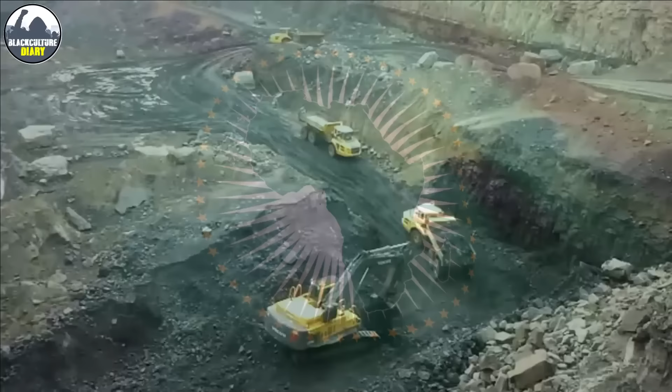Can Africa's rich resources facilitate a shift to green energy? Burkina Faso has taken a bold step with the completion of its hydroelectric power station. This station marks the beginning of a new energy journey for Africa. It promises not only a better economic future, but also an improved quality of life for the locals, as it is safer. However, how smooth will this transition be? And what does this project signify at this moment? Let's find out.

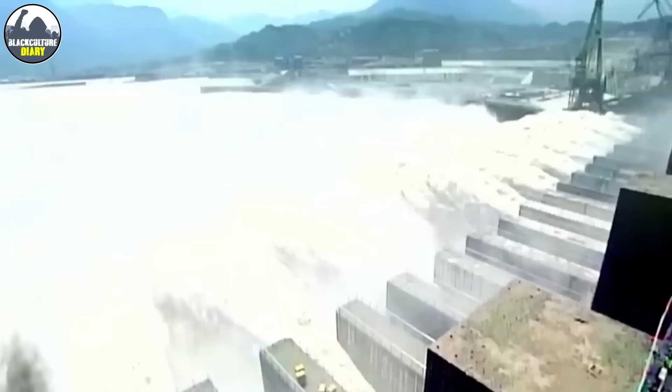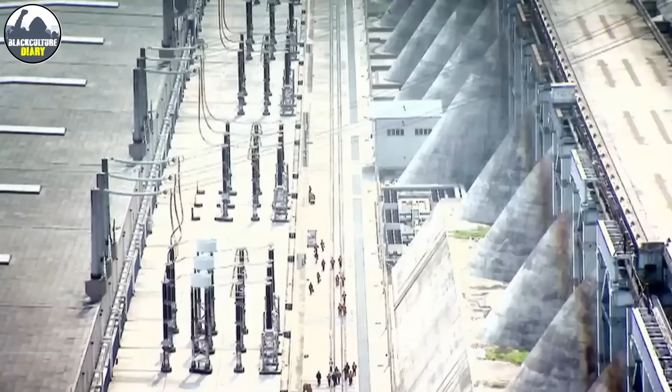The recent completion of the hydroelectric power station marks a significant milestone for Burkina Faso. This mega project, which promises to revolutionize the country's energy sector, has been meticulously executed and is now poised to begin operations. The power plant is expected to provide a reliable and sustainable energy source, contributing to the nation's economic development and improving the quality of life for its citizens.

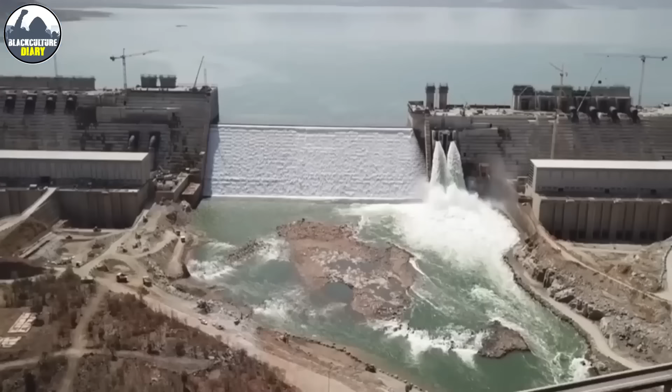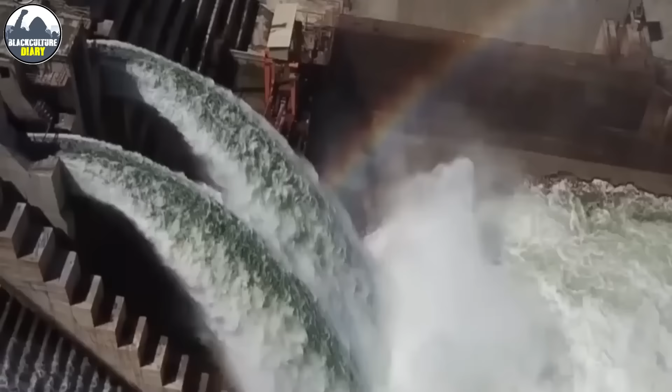But why this initiative? The idea for the hydroelectric power station was conceived as part of Burkina Faso's broader strategy to diversify its energy sources and reduce reliance on fossil fuels. The project aimed to harness the power of the country's abundant water resources, leveraging them to generate clean and sustainable electricity. Initial feasibility studies were conducted to assess the potential sites, water flow, and environmental impact.

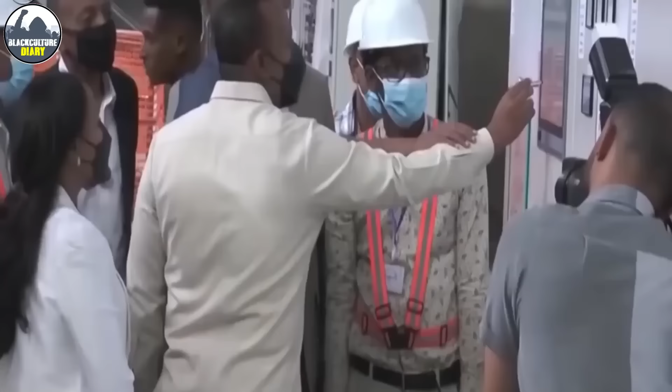The planning phase involved collaboration between local and international experts, government agencies, and private sector partners. Detailed blueprints were created, outlining every aspect of the construction process. Environmental assessments ensured that the project would not adversely affect local ecosystems, and measures were put in place to mitigate any potential risks.

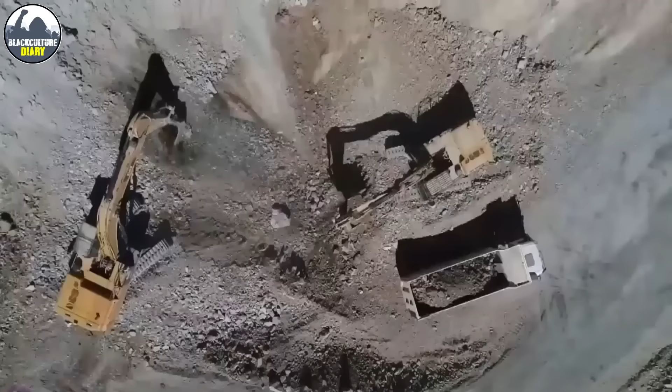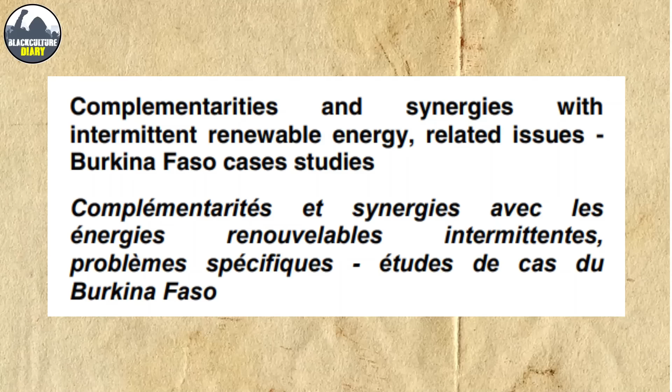Construction of the hydroelectric power station was divided into several key phases, each requiring specialized skills and technologies. The first phase involved the construction of the dam, which required extensive excavation and earth-moving activities. Advanced engineering techniques were employed to ensure the dam's structural integrity, taking into account factors such as water pressure, sediment load, and seismic activity.

The second phase focused on building the power station itself. This included installing turbines, generators, and transformers, all of which are crucial components in converting the kinetic energy of flowing water into electrical energy. The installation process required precision and expertise, with teams working around the clock to meet tight deadlines.

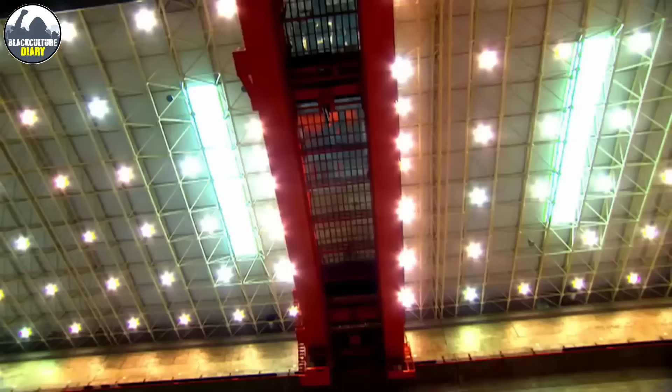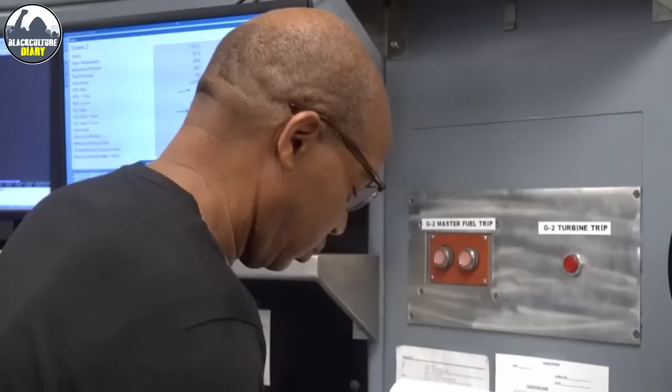The third phase involved constructing the infrastructure necessary to support the power station's operation. This included building access roads, water intake and outflow channels, and housing for the operational staff. Additionally, control systems and monitoring equipment were installed to ensure the plant could be operated efficiently and safely.

Throughout the project, stakeholder involvement was crucial to its success. Regular meetings were held with government officials, community leaders, and environmental groups to keep them informed of progress and address any concerns. This transparent approach helped build trust and ensure that the project had broad support.

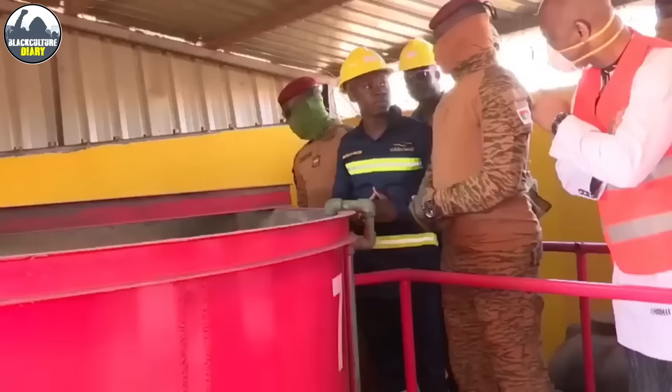International partners played a significant role in providing technical expertise and funding. Development agencies and foreign governments offered grants and low-interest loans, recognizing the project's potential to contribute to regional stability and economic development.

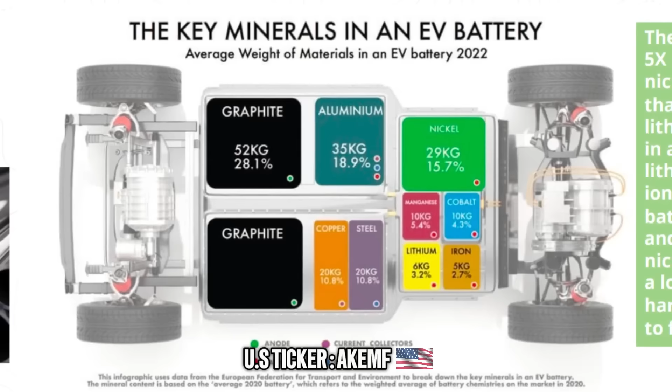Do you know that the United States has only one nickel mine? We import almost all the nickel we use, and that is risky. Earlier, the United States did not know what nickel would mean in the future. That's because no one had the idea of green energy and electric vehicles, in which nickel is the main component. After all, nickel is used in batteries, making them more energy dense, giving longer range.

The United States chose to outsource nickel production, relying on globalization. But now, the hard reality is, no country can depend entirely on globalization, because countries like China, Russia, and their allies are determined to break the world order, which is mainly driven by the United States, having globalization at its center. Not only that, but demand for nickel has increased to a historic level due to electric vehicles and clean energy. Elon Musk said nickel is his biggest concern in scaling lithium-ion battery production.

That's why he asked miners to mine more nickel, without which green energy storage is not possible. However, S&P Global Intelligence says nickel is difficult to find and discover. And as of now, there are not enough nickel mines in the free trade countries of the world, even if we ignore mine scarcity in the United States. So, what does it mean? Well, at any moment, the United States could have a severely reduced nickel supply. The single mine in the US has limited capability and is scheduled to run out of ore soon.

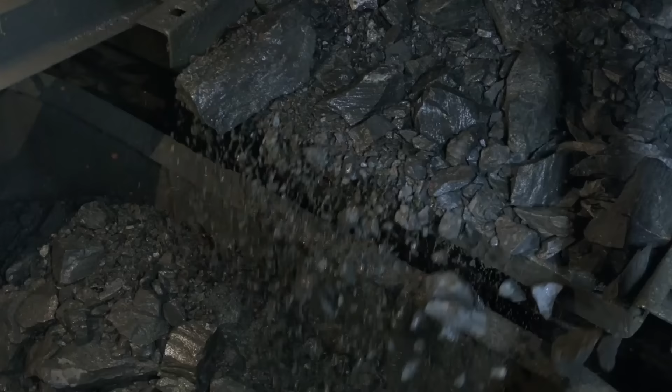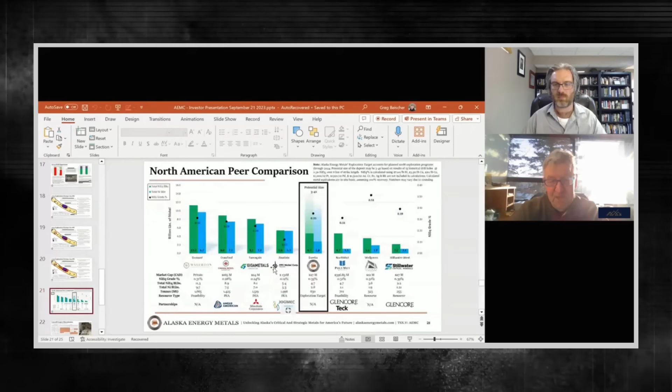And the project deserves that kind of approach. It's not a go-slow thing. America needs nickel, that much is very clear. And we've got it, but we've got to prove it too. We have a quite high confidence level that it's there based on historic drilling, but we've got to drill it off at 300 meters to be able to say that with geologic confidence and in keeping with the 43-101 regulations.

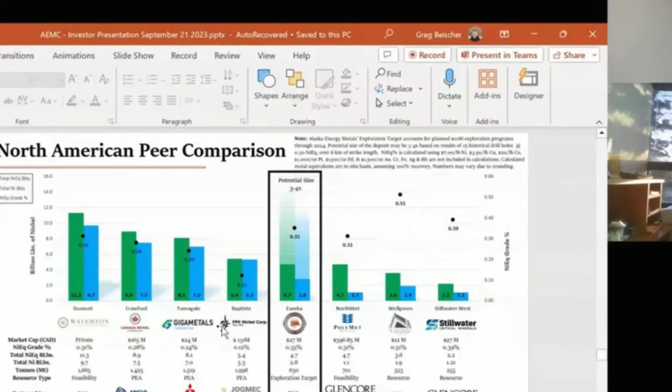But what if a nickel mining company can capitalize on this and use it as leverage? Well, Alaska Energy Metals, traded under the ticker AKEMF, is the leader in this. And what if you would invest in this company? Before doing so, you have to know some truths that will make you wonder why you did not come to know about this company before.

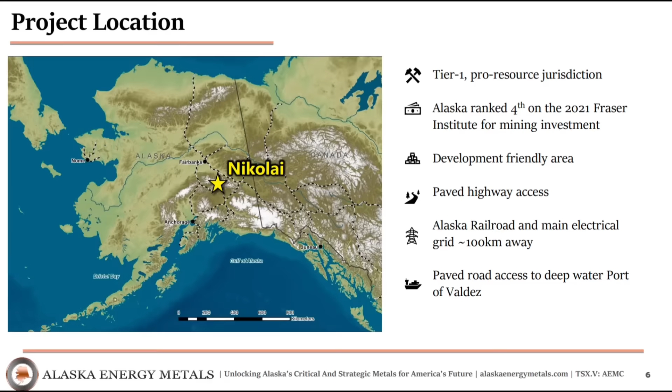You should know that there's another nickel company, KoBold Metals, that has some heavy hitter investors, like Jeff Bezos, Richard Branson, Ray Dalio, Bill Gates, and others. This company uses the most cutting-edge AI to find nickel. And guess what? Their algorithm identified the Nikolai project area as being prospective for nickel mineralization, exactly where Alaska Energy Metals' property is. So KoBold picked up a massive piece of land right next to Alaska Energy Metals' Nikolai project.

Alaska Energy Metals has an extensive data set which partly covered KoBold's claims. Guess who bought the data? Yeah, KoBold bought data from Alaska Energy Metals. Listen to what the CEO of the project said.

This is the project that brought me to Alaska in 1995. My first career as a young geologist was with Inco, and they had moved me all around North America, and I learned a lot, but they moved me here to be exploration manager and to focus on this project, which the global targeting team had identified as having similar geologic and geochemical characteristics to the Norilsk area of Russia, which of course is probably the largest accumulation of nickel sulfide deposits on Earth.

Now you might think that this will make Alaska Energy Metals shares expensive and unreachable for ordinary investors. Well, luckily, that's not the case. The price the CEO negotiated for this property is literally the deal of the century. The previous owner of the property, which is now controlled by Alaska Energy Metals, spent $30 million on drilling and other exploration efforts to define the nickel in the ground. But the CEO of Alaska Energy Metals, Gregory Beischer, bought the data and the land package for only $1.8 million.

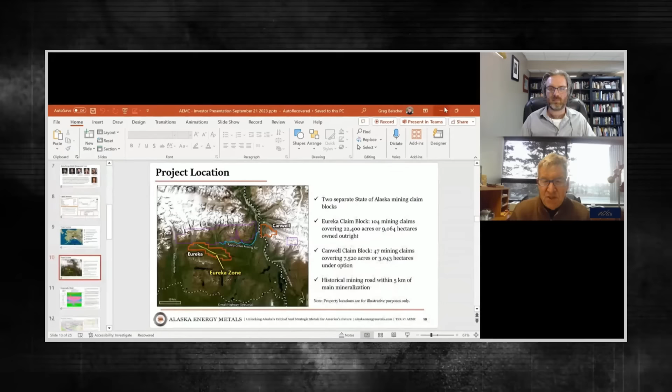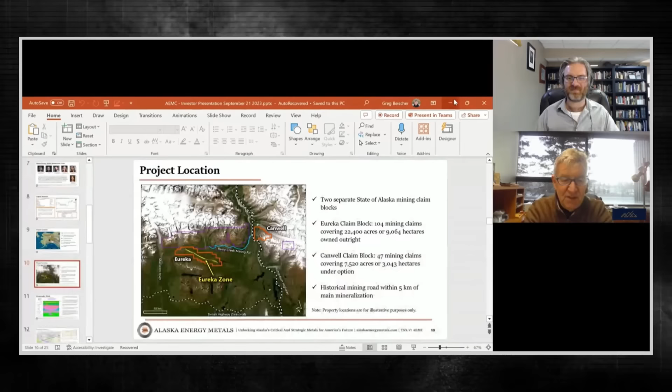That's 95% off. Listen to what the CEO said. I saw the claims come open around 2018, didn't move immediately on it, but after a while I saw that these lower grade disseminated sulfide deposits really might be the next generation of nickel deposits that our industry has to mine to meet what appears to be a surging demand. So we jumped on it. And so it was kind of full circle for me. The project that brought me to Alaska, I'm on it again. And in the intervening 25 years, I've explored all over this great state.

As of now, the market cap of the company is only $14 million, which is so undervalued. Similar companies that are a little more advanced have a market cap between $100 to $180 million. Just for comparison, Alaska Energy Metals owns a nickel resource containing 8 billion pounds of nickel, and its market cap is $14 million. However, Canada Nickel owns a resource of 13 billion pounds of nickel and has a market cap of $180 million. So yeah, there is that.

This means that no matter what, the market cap will reach its normal level. We can see the potential for Alaska Energy Metals' market cap to rise up closer to its direct peers, rising from $20 million to $100 million and beyond. And those who would have invested in the company at these low share price levels could see their stock prices swell as the company advances the project.

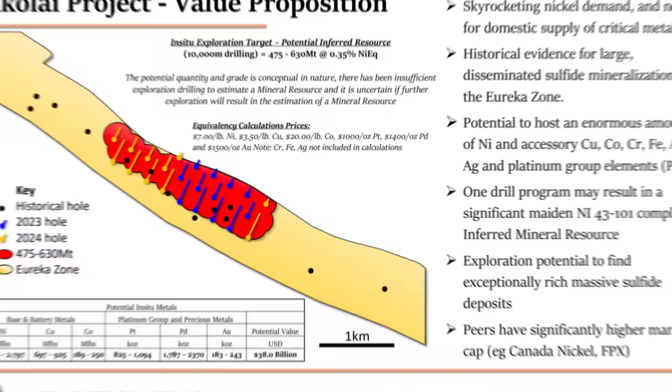And guess what? The company is actively working on defining the resource, which means that the biggest single catalyst for shareholder value creation is imminent. Listen to what the company's CEO said. Well, our main focus is the Nikolai project in central Alaska, where from historical drilling it looks like there should be a very large deposit of nickel with accessory cobalt, copper, chrome, and platinum group elements.

And I've known about the project a long time, and I've decided that our company will focus on this project, and we're drilling off. We've done the drilling this summer and should be in a position to announce our first resource quite soon. And I think it's going to open some eyes. People are going to realize this could be a really large accumulation of nickel metal.

Earlier, he founded Millrock Resources, leading a team that built a successful project generator company, attracting over $50 million in capital. And just recently, Mario Vetro joined the board of directors. He earlier co-founded K92 Mining, which employs 1,600 people in Papua New Guinea, where the company produces high-grade, low-cost gold, and trades at nearly a $2 billion market cap.

He brought with him Ian Stalker, who was CEO of K92 Mining, to the team. So yeah, the team is an expert in what they are doing, and they have a track record of scaling companies like Alaska Energy Metals. Private sector investors also saw the project's value, providing additional capital and expertise.

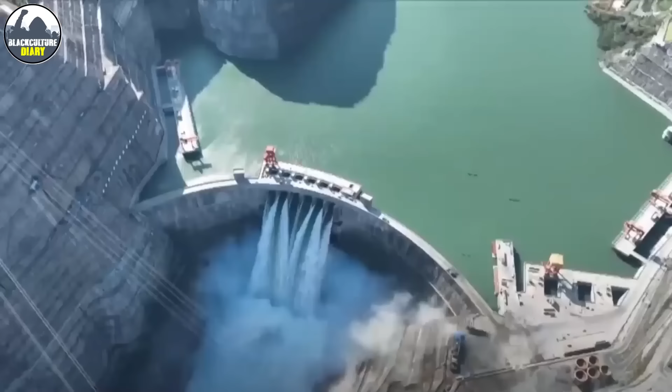Let's continue now. The inspection phase of the hydroelectric power station was a critical step in ensuring the project's safety and effectiveness. A team of independent experts was brought in to conduct a thorough evaluation of the power station's components and systems. This inspection covered several key areas.

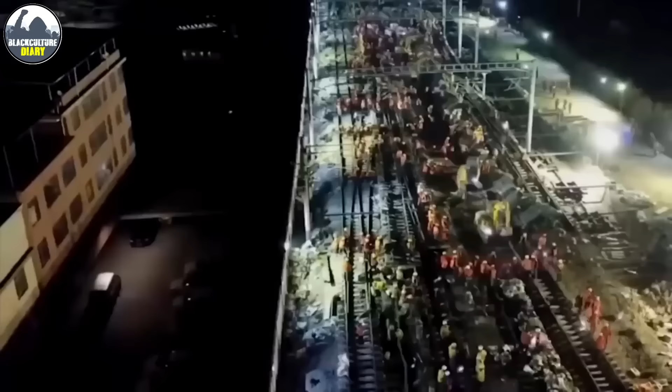Engineers conducted detailed assessments of the dam and power station structures, checking for any signs of weakness or potential failure points. Advanced imaging and testing techniques, such as ultrasonic testing and ground-penetrating radar, were used to examine the integrity of concrete and steel components.

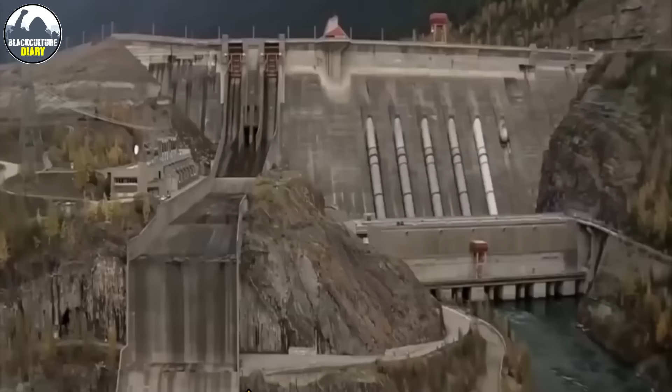The turbines, generators, and transformers underwent rigorous testing to ensure they were operating within specified parameters. This involved running the systems under various load conditions and monitoring performance metrics such as efficiency, temperature, and vibration levels.

The plant's control systems were tested to ensure they could effectively manage the power generation process. Safety systems, including emergency shutdown procedures and flood control mechanisms, were also tested to verify their reliability.

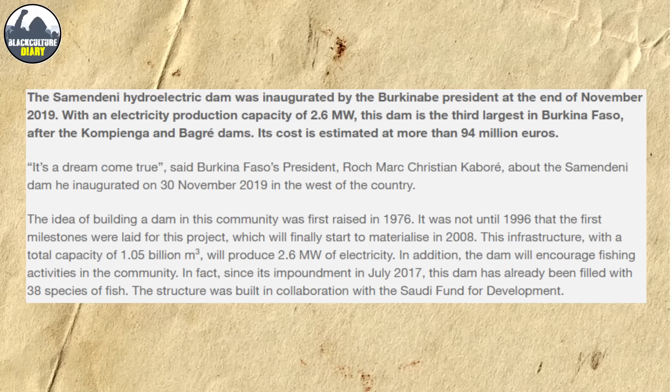Environmental scientists conducted studies to assess the impact of the power station on local ecosystems. This included monitoring water quality, fish populations, and downstream effects. Mitigation measures, such as fish ladders and sediment control systems, were evaluated for their effectiveness.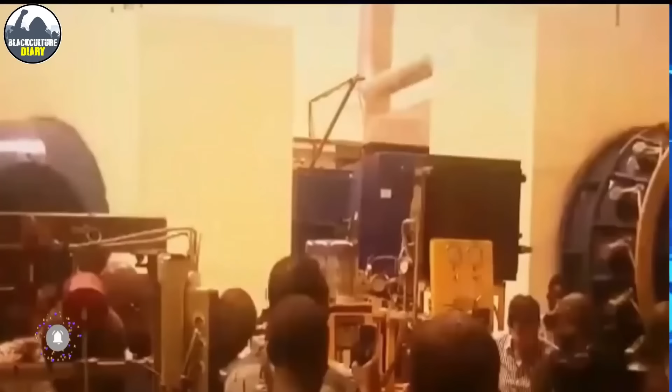The final inspection, conducted last Friday, was a comprehensive evaluation of the power station's readiness to begin operations. The inspection team included representatives from government agencies, independent engineering firms, and international partners. Over several days, they conducted a detailed review of all systems and components.

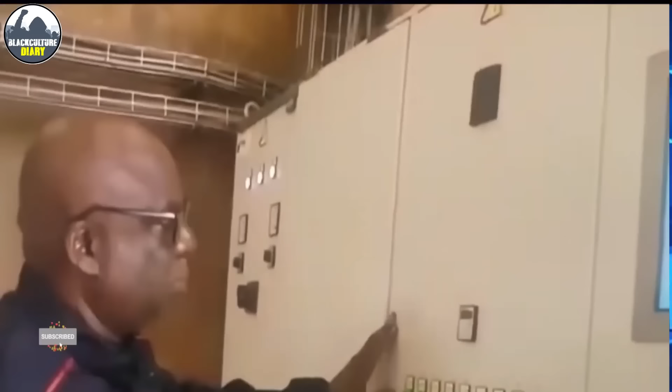The inspection process involved multiple stages, starting with a walkthrough of the facility. Inspectors reviewed the operational procedures, safety protocols, and maintenance schedules. They also conducted live tests, running the turbines and generators under various conditions to simulate real-world scenarios. Data collected from these tests were analyzed to ensure the systems were performing as expected.

Upon completion of the inspection, the team concluded that the Samini Hydroelectric Power Station met all regulatory and safety standards. They authorized the plant to begin operations, marking the end of the construction phase and the start of a new era in Burkina Faso's energy sector.

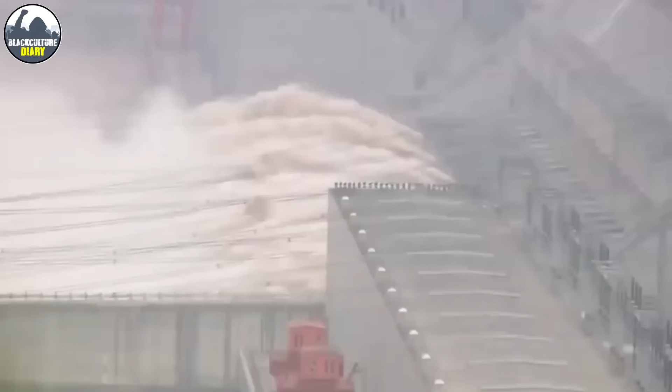Now let's talk about the technical specifications and investments. The hydroelectric power station has been designed to leverage the natural flow of the Samini River, utilizing advanced technology to generate electricity efficiently and sustainably.

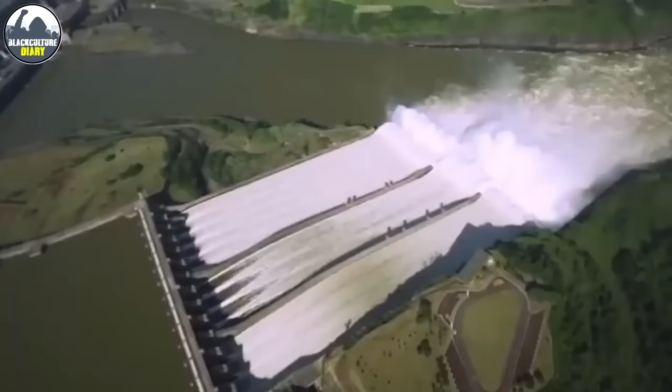The facility is equipped with state-of-the-art Kaplan turbines, known for their efficiency in converting hydraulic energy into mechanical energy. These turbines are specifically designed to handle varying water flows, making them ideal for the Samini River's conditions.

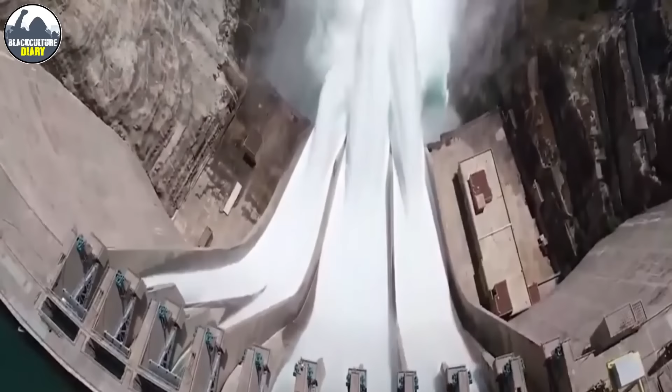The generators coupled with these turbines are capable of producing high-voltage electricity, which is then stepped up by transformers for transmission over long distances. High-efficiency transformers are installed to step up the voltage from the generators to the transmission level. This step is crucial for reducing energy losses during transmission.

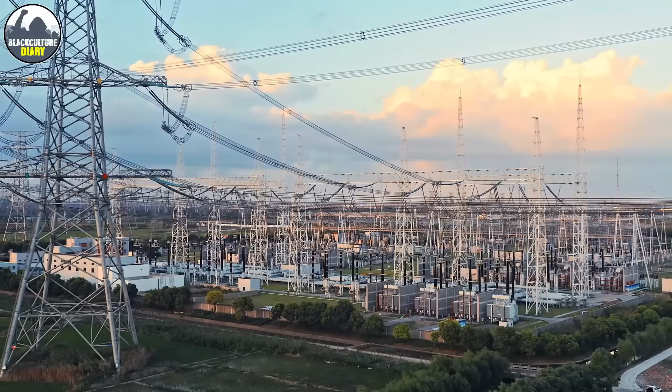Advanced switchgear systems are used to control the flow of electricity, ensuring the safety and reliability of the power distribution network. These systems include circuit breakers, disconnectors, and protection relays that help manage faults and maintain uninterrupted power supply.

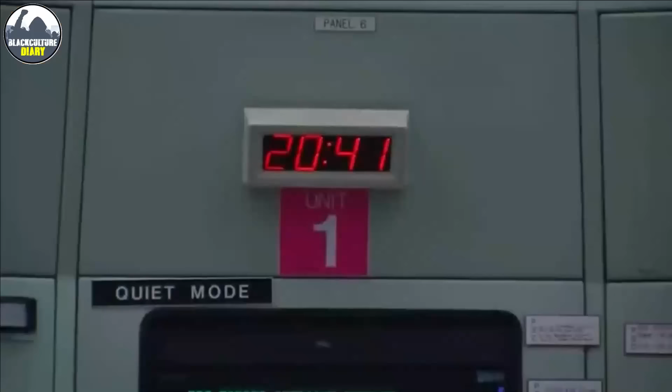The power station features a centralized control room equipped with modern SCADA supervisory control and data acquisition systems. These systems allow operators to monitor and control the entire plant remotely, ensuring optimal performance and quick response to any issues. Automated control systems are also integrated to adjust the operation of turbines and generators based on real-time data, maximizing efficiency and minimizing manual intervention.

The dam associated with the power station has a height of 85 meters and a crest length of 1.5 kilometers. Its design includes multiple spillways to manage excess water flow and prevent flooding.

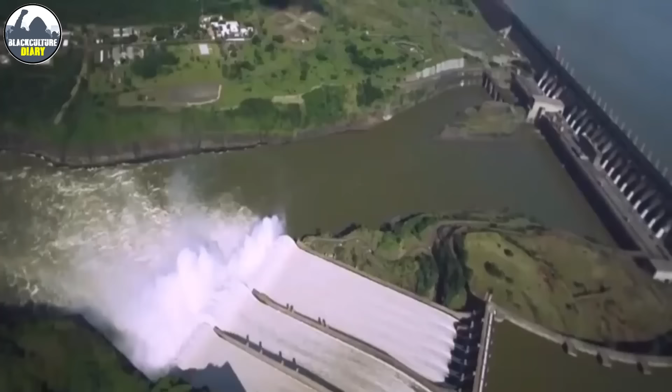The reservoir created by the dam has a retention capacity of 1,050,000,000 cubic meters of water, which serves as a buffer to ensure a steady supply of water to the turbines even during dry seasons.

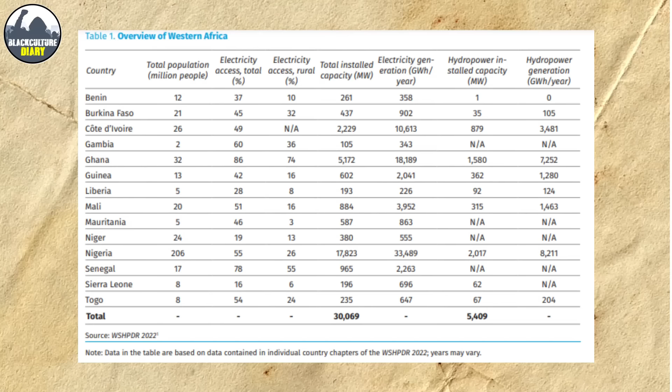And what about the investment details? The financial investment in the hydroelectric power station is as impressive as its technical specifications. The project required careful financial planning and collaboration between various stakeholders to secure the necessary funds. The total cost of the project is $7,425 million. This substantial investment reflects the project's scale and the advanced technology used in its construction.

The funding for the project came from a mix of sources, including government grants, international loans, and private investments. The Burkina Faso government played a crucial role by providing initial funding and securing additional financial support from international development agencies. These agencies recognize the project's potential to promote sustainable development and energy security in the region.

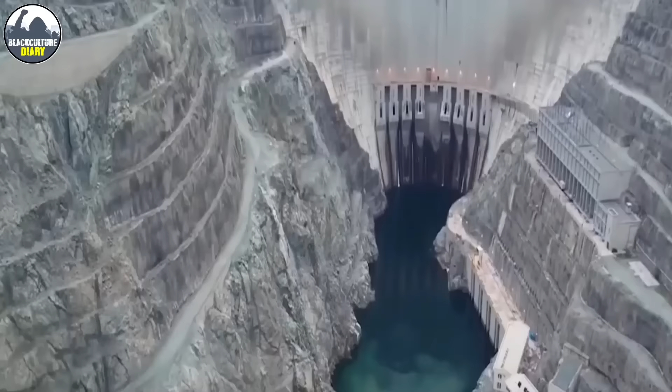Private sector investors also contributed significant funds, attracted by the project's long-term profitability and the growing demand for clean energy in West Africa. The project's financial structure involved a combination of debt and equity financing. This approach helped distribute the financial risk and attract diverse investors.

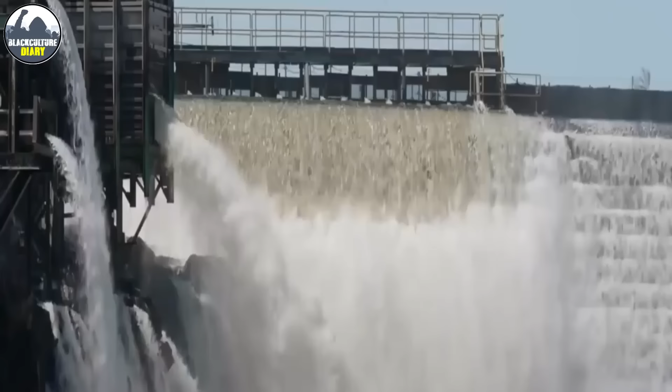Long-term loans were secured at favorable interest rates, thanks to the project's strong financial viability and the involvement of reputable international lenders. Equity investments were made by private companies with expertise in renewable energy projects, ensuring that the project benefited from both financial and technical support.

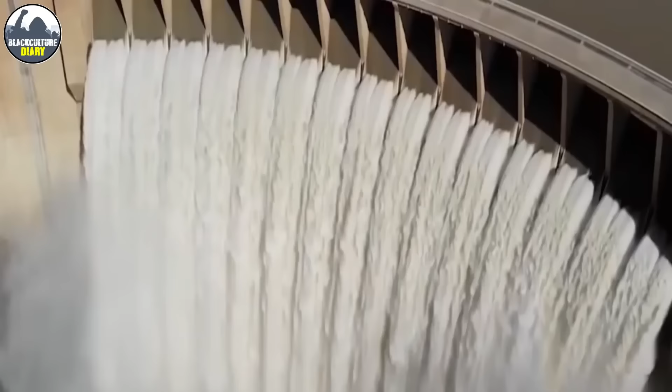Now the question is, how will this project benefit Burkina Faso? The construction and operation of the hydroelectric power station have significant economic implications for Burkina Faso. The project created thousands of jobs during the construction phase, providing employment opportunities for local communities. The operational phase will continue to generate employment, particularly in the areas of plant maintenance, management, and local supply chains.

The reliable supply of electricity from the power station is expected to boost local industries, attract new businesses, and support the overall economic growth of the region.

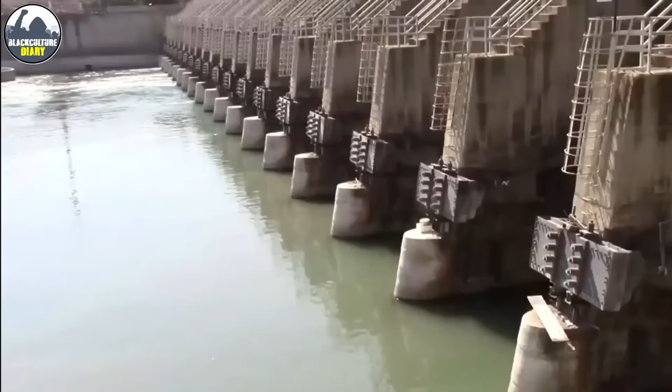Hydroelectric power is a cost-effective and sustainable energy source. Once the initial construction costs are covered, the operational costs are relatively low, primarily involving maintenance and management. The power station is projected to generate substantial revenue through the sale of electricity, ensuring a strong return on investment for stakeholders.

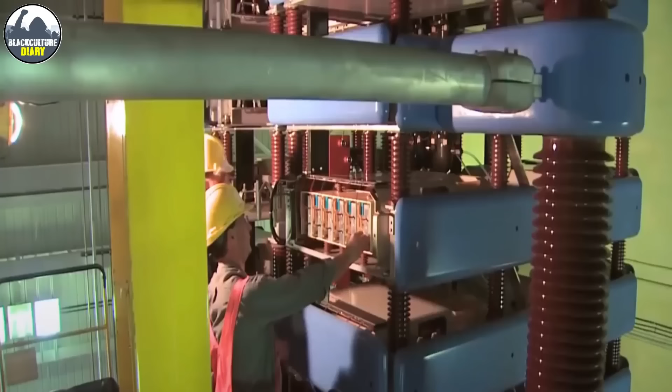The environmental benefits of the project, such as reducing greenhouse gas emissions and promoting sustainable water management, further enhance its long-term value. The successful completion of the hydroelectric power station sets the stage for future investments in renewable energy infrastructure in Burkina Faso. The project serves as a model for similar initiatives, highlighting the feasibility and benefits of large-scale hydroelectric power generation.

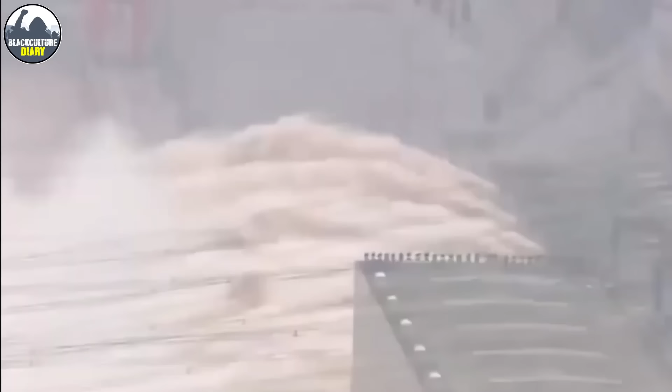Plans are already underway to expand the capacity of the Samendeni Hydroelectric Power Station. This expansion will involve the installation of additional turbines and generators, further increasing the plant's output. Additional reservoirs and auxiliary dams are being considered to enhance water management and ensure a steady supply of water for power generation, even during periods of drought.

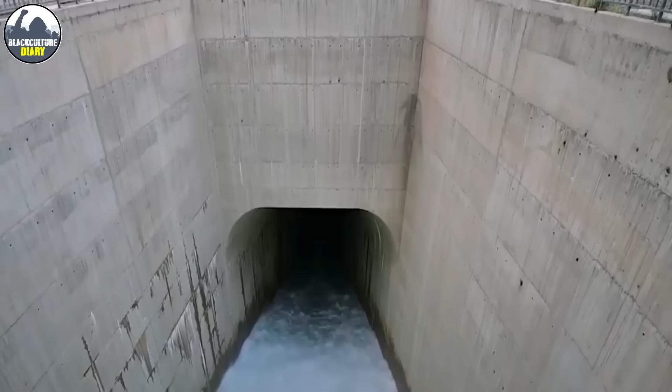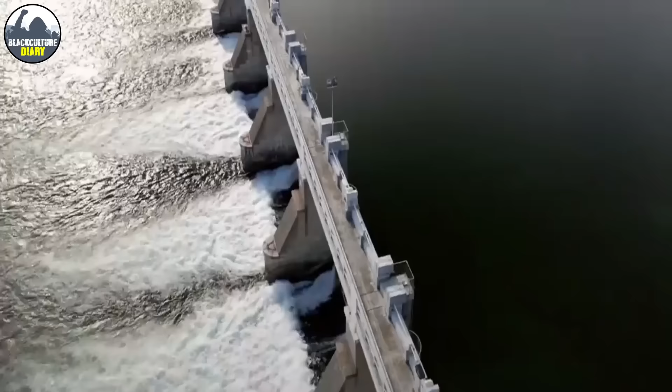The project aligns with regional efforts to develop a more interconnected and resilient power grid in West Africa. By providing a stable and substantial source of electricity, the Samendeni Hydroelectric Power Station will play a crucial role in regional energy security. Efforts are being made to integrate the power station into regional power networks, allowing Burkina Faso to export surplus electricity to neighboring countries and strengthen regional cooperation.

Continuous research and development are essential to maintaining the efficiency and sustainability of the power station. Ongoing R&D efforts will focus on optimizing turbine performance, enhancing control systems, and minimizing environmental impact. The project provides a valuable opportunity for local universities and research institutions to collaborate with international partners, fostering innovation and knowledge transfer in the field of renewable energy.

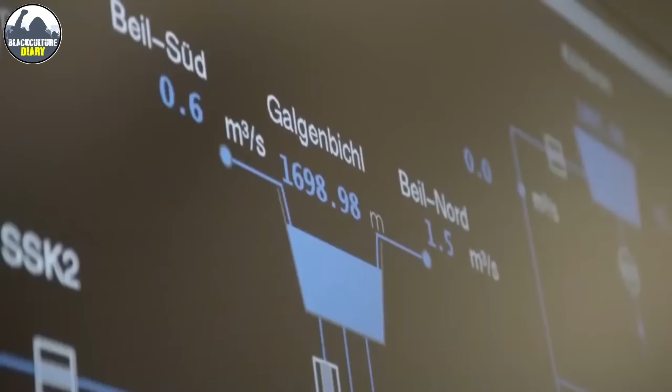The project includes initiatives to engage local communities and ensure they benefit from the development. This includes community development programs, educational initiatives, and support for local businesses. Access to reliable electricity will improve the quality of life for residents, providing better opportunities for education, healthcare, and economic activities.

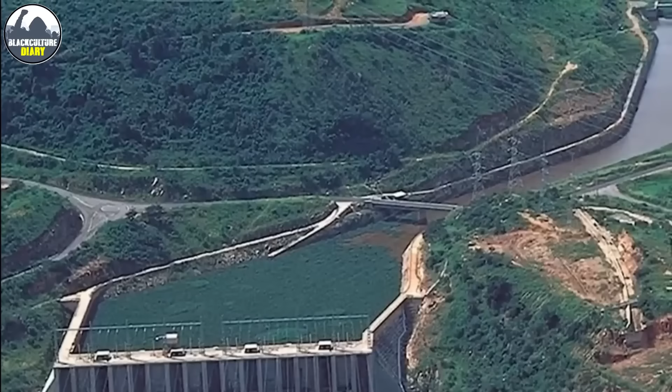Environmental sustainability remains a core focus of the project. Ongoing efforts will ensure that the power station operates in harmony with the local ecosystem, protecting biodiversity and promoting sustainable water management practices. Environmental monitoring programs will continue to assess the impact of the project and implement necessary measures to mitigate any negative effects.

The final reception is planned for June 28, 2025. This date will represent the ultimate endorsement of the project's success, following a period of rigorous operational testing and fine-tuning. By then, any remaining issues will be addressed, ensuring that the power plant operates at its full potential.

Now the question is, what does it mean for Africa to shift from nuclear energy to green energy? Africa, a continent endowed with an abundance of natural resources, stands at a critical juncture as the world shifts towards sustainable energy solutions.

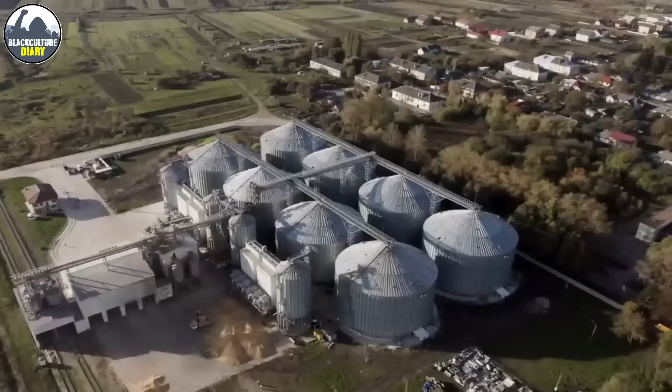The transition from nuclear energy to green energy in Africa is not just an environmental imperative, but a multifaceted strategy that encompasses economic, social, and geopolitical dimensions. This shift holds profound implications for the continent's development trajectory, energy security, and global standing.

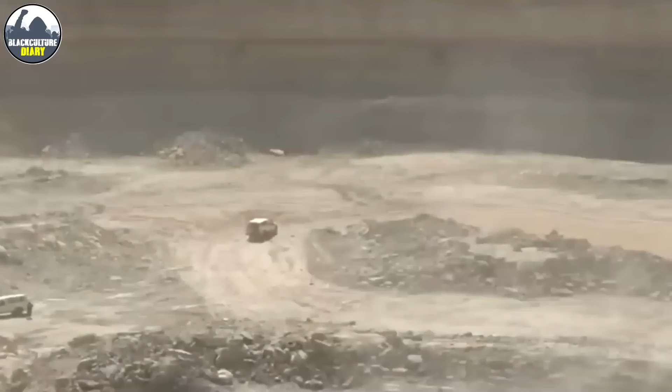Africa's rich endowment of resources, including uranium for nuclear energy, remains valuable. However, the global push towards green energy does not render these resources obsolete. Instead, it provides an opportunity for diversified utilization. Uranium and other minerals can still be exploited, albeit in smaller quantities, for various industrial applications and the gradual phasing out of nuclear energy.

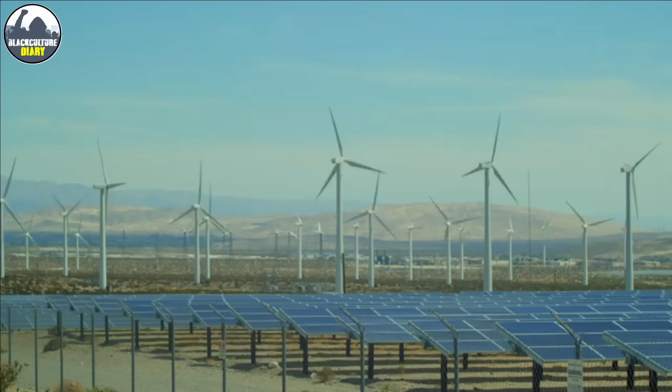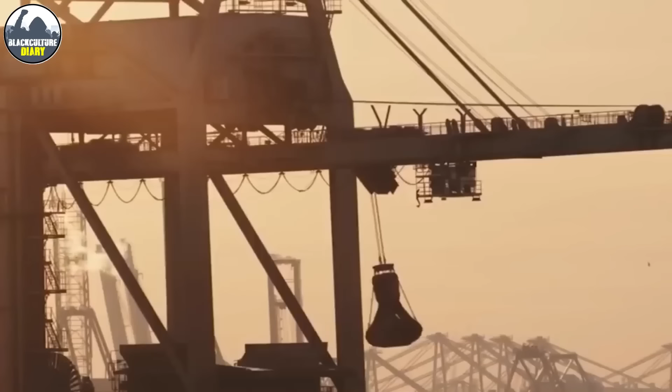The focus, however, shifts towards leveraging the continent's vast renewable resources, such as solar, wind, hydro, and geothermal energy. Transitioning to green energy can stimulate economic diversification, reducing over-reliance on a single resource or energy type. By investing in renewable energy infrastructure, Africa can create jobs, spur technological innovation, and develop new industries. For instance, solar panel manufacturing, wind turbine production, and maintenance services for renewable energy installations can become significant employment sectors, contributing to economic resilience and growth.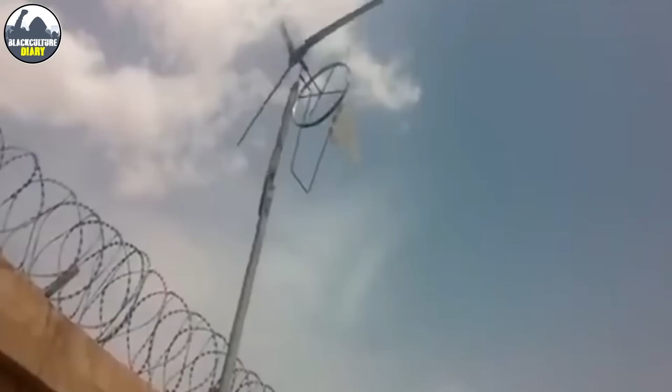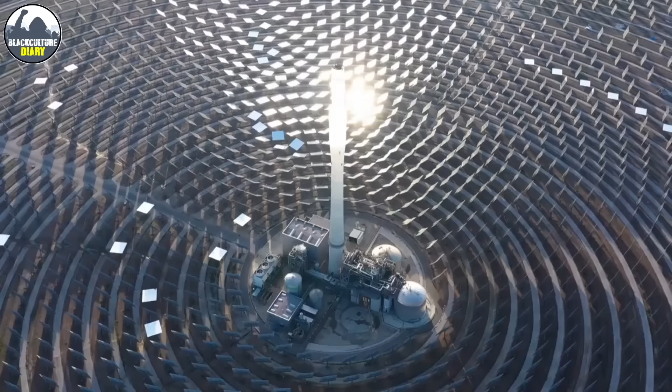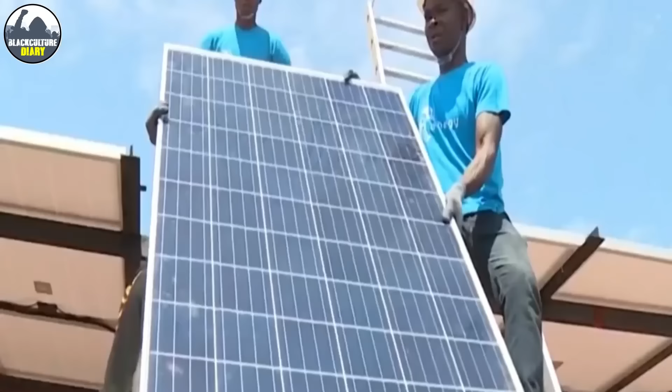One of the most pressing issues in Africa is energy access. Despite its resources, many African nations face chronic energy shortages and lack reliable access to electricity, particularly in rural areas. Green energy offers a decentralized solution that can address these gaps more effectively than centralized nuclear power plants. Solar and wind energy systems can be deployed in remote areas, providing off-grid communities with clean, reliable electricity and enhancing their quality of life.

Green energy also enhances energy security by reducing dependence on imported fuels and the vulnerabilities associated with centralized power generation. Renewable energy sources are abundant and locally available, making countries less susceptible to global energy market fluctuations and geopolitical tensions. This autonomy can lead to more stable and predictable energy pricing, benefiting consumers and industries alike.

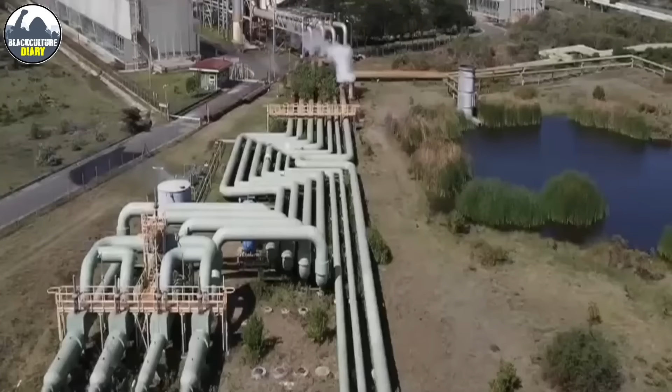The environmental and health benefits of shifting from nuclear to green energy are significant. Nuclear energy, while low in carbon emissions, poses risks related to radioactive waste disposal, potential nuclear accidents, and long-term environmental contamination. These risks are particularly concerning in regions with limited regulatory oversight and emergency response capabilities.

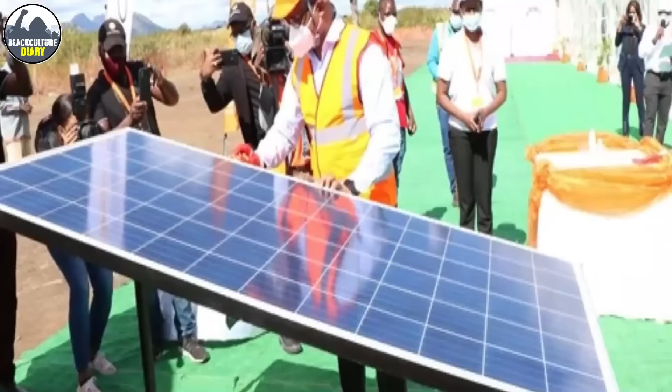In contrast, green energy solutions such as solar, wind, and hydropower produce no harmful emissions or hazardous waste. They contribute to cleaner air and water, mitigating the adverse health impacts associated with fossil fuels and nuclear energy. This transition aligns with global climate goals, helping Africa reduce its carbon footprint and combat climate change. As the continent is highly vulnerable to climate impacts, adopting green energy can also bolster its climate resilience.

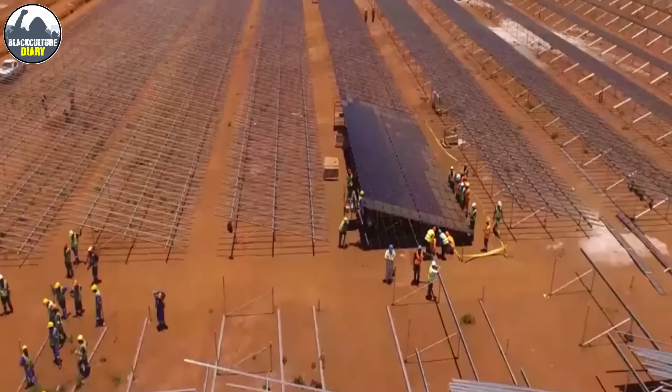The transition to green energy can have profound social impacts, promoting inclusivity and community development. Renewable energy projects often involve local communities in planning and implementation, fostering a sense of ownership and empowerment. These projects can provide training and education opportunities, building local capacity and technical skills.

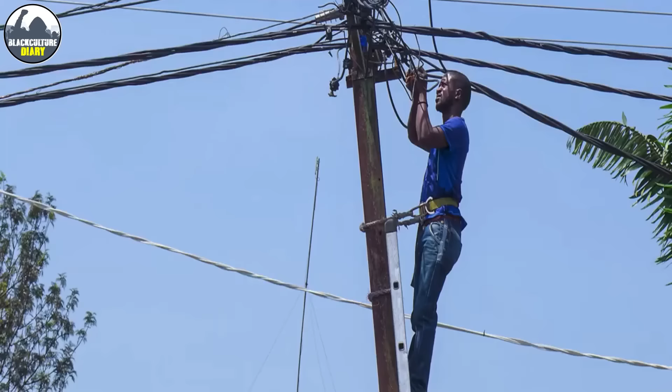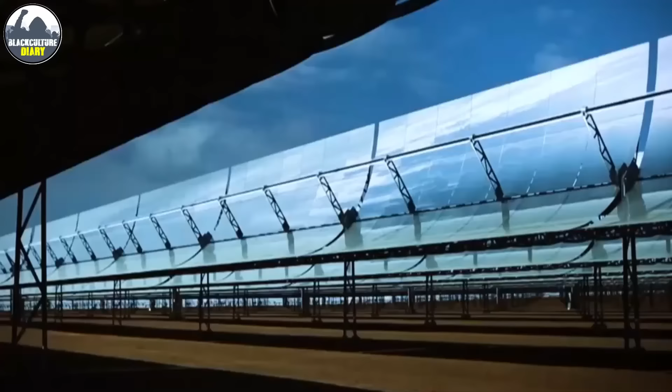Moreover, green energy projects can improve public services. For example, solar-powered schools and clinics can operate more effectively, enhancing education and healthcare outcomes. Electrification through renewables can also support small businesses and agricultural activities, driving local economic development and improving livelihoods.

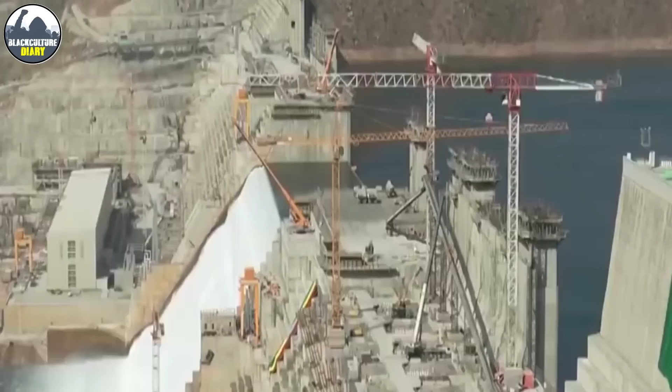For Africa to successfully transition to green energy, robust policy frameworks and significant investment are essential. Governments must create conducive environments for renewable energy development through clear policies, incentives, and regulatory support. This includes establishing feed-in tariffs, tax breaks, and subsidies for renewable energy projects, as well as streamlining permitting processes.

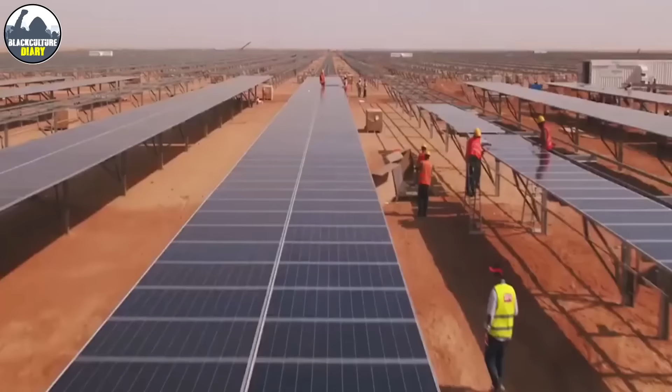Investment in infrastructure is also crucial. This entails building transmission and distribution networks that can accommodate renewable energy sources, investing in research and development, and fostering public-private partnerships. International cooperation and financing will play a vital role, with developed countries and global financial institutions providing support through grants, loans, and technology transfer.

Africa's shift to green energy also has geopolitical implications. As the global energy landscape changes, countries that are early adopters of renewable energy can position themselves as leaders in the emerging green economy. Africa has the potential to become a key player in the global renewable energy market, exporting surplus clean energy and renewable technologies.

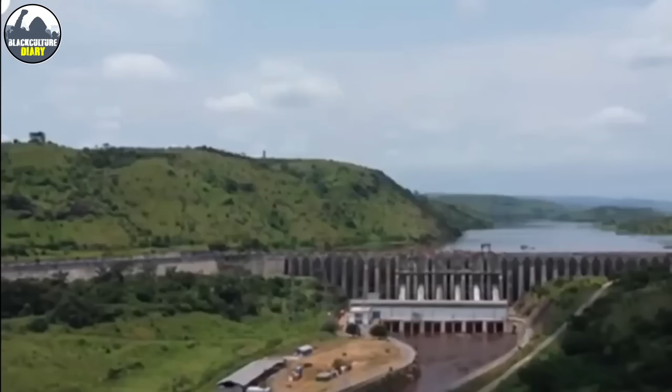This transition can also redefine Africa's relationships with traditional energy partners. Historically, many African countries have been energy exporters, particularly of oil and gas, to global markets. Moving towards green energy can reduce this dependency, fostering more equitable and sustainable international partnerships. Additionally, it can attract new investment from countries and corporations committed to sustainability, further integrating Africa into the global green economy.

Do you think this new project will pave the way to green energy? Should Burkina Faso be credited for taking the first step? Let us know in the comment section. Are we witnessing a transitional stage in Africa?